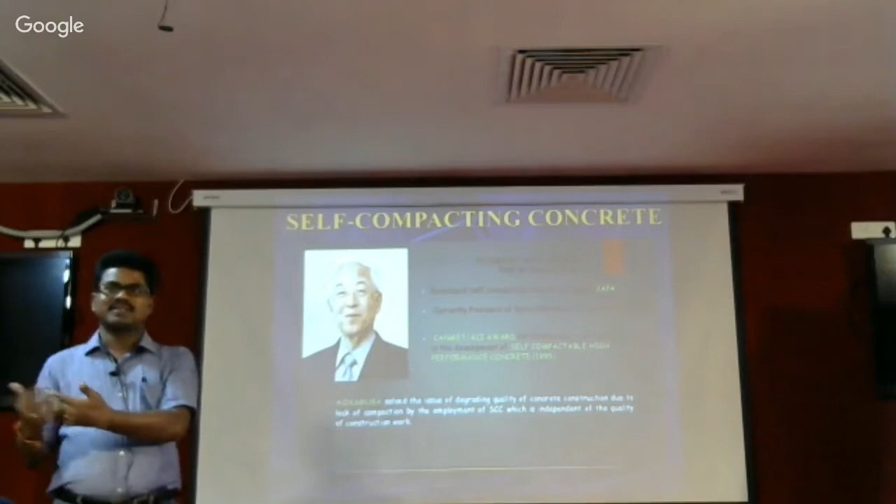What happens if I am using regular concrete? One more thing I want to share: before coming to this post, I was also an assistant executive engineer in the public works department. So I know what practical problems we face. They give some provisions as per the booklet, but it is very difficult to implement all of them.

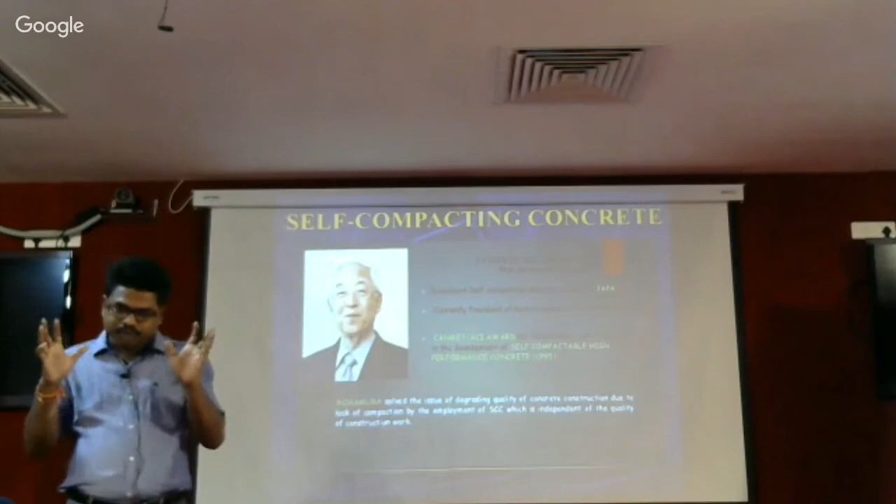They will say this slump is required, this is the concrete, and even practically we have seen yesterday what type of aggregate is available at the site. So it is very difficult to maintain whatever specifications you have, but you have to take a decision with the available material.

You have to try to get good quality concrete. So this is your own decision. Suppose the aggregate is not that good quality, then whether you have to reduce its content, or what measures you have to take, so that even though some material is not good, you still get good concrete. Practically, I think all of you are doing the same with your experience.

When we are working with concrete in regular cases, even if it is giving the strength we are expecting, we are not going to accept it without workability. Workability is the main criteria for the concrete. Strength through workability - that is the concept of concrete for regular concrete.

Suppose you are going for high strength concrete, the concept is similar - we are going to get the same strength through workability. Suppose I am developing M80 or M60 concrete, I have to get 80 MPa without compromising anywhere on workability properties. Workability means how easy you are going to work with that concrete - it should flow easily into all spaces.

Yesterday we saw that bridge - it is completely fully packed with reinforcement, heavily reinforced. In those cases it is very difficult to compact the concrete. Because of that, he developed a concrete in such a way that it compacts under its own weight - no need of any external vibration.

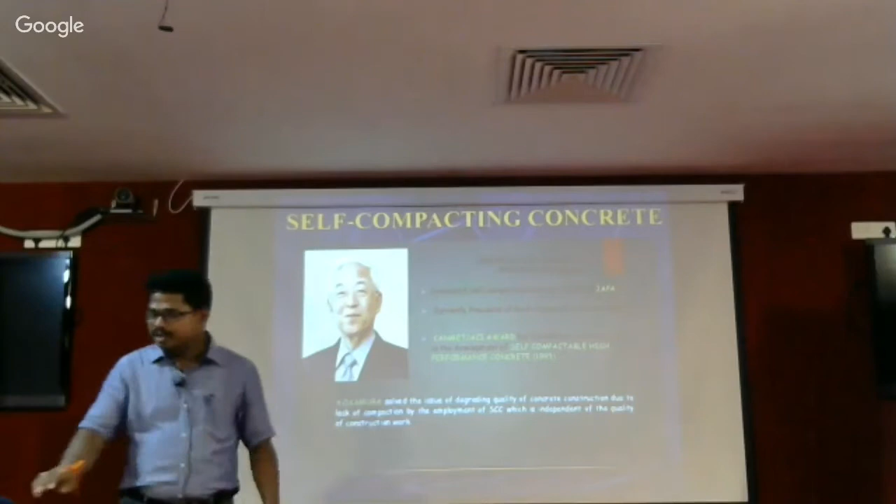Here in the mix design itself, we are going to prepare a mechanism so that it compacts under its own weight. Suppose you are taking a certain volume and putting all these ingredients in it. In our regular concrete, if you see the ratios, coarse aggregate content is more than fine aggregate, and fine aggregate content is more than cement.

Like that you are preparing it, and if there are any voids, you try to compact and avoid those voids by compaction - you are trying to minimize the voids. So in this method, at the time of mix design only, the main concept is if it is densely packed, automatically the voids are eliminated. If it is densely packed, you will directly get high density, and automatically you get high strength - strength is directly related to density.

In a given certain volume, if you are able to fill all the voids with the fines, there's no need of any external vibration. We vibrate to avoid these voids, so here in the mix design itself, we are trying to eliminate the voids.

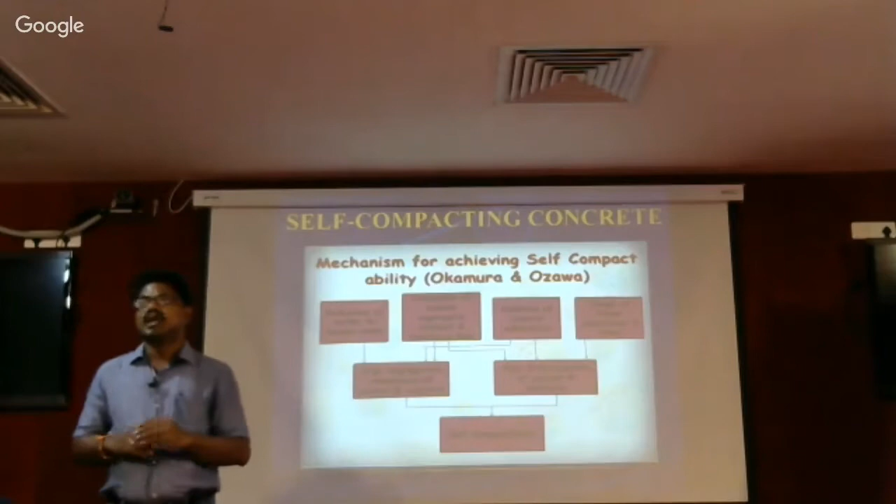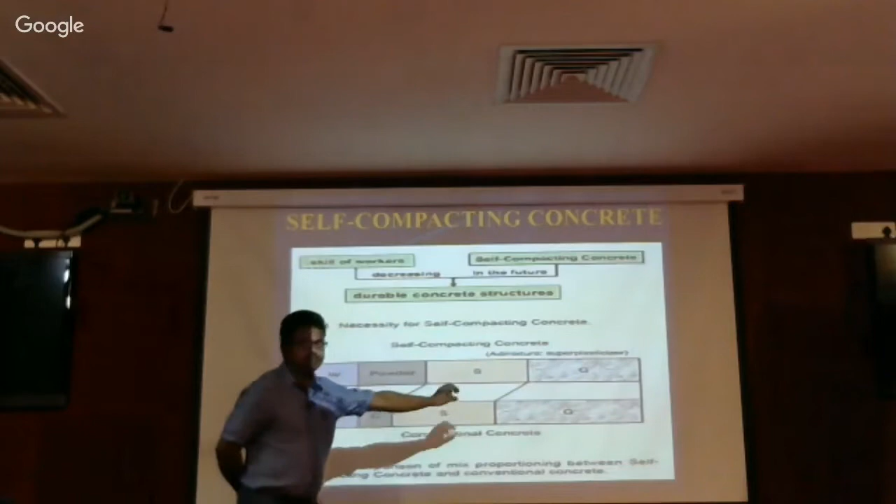For that content, here in SCC, actually what we are doing is, generally the coarse aggregate content is much in our regular concrete, and similarly sand proportion, then cement and water. So in the SCC, if I am increasing the coarse aggregate content, automatically the voids are also increasing.

That's why I am going to limit the coarse aggregate content. I am going to decrease the volume of coarse content, but I am not compromising the strength. Whatever the minimum coarse aggregate is required for that grade of concrete, that I am fixing. Then, because here I am trying to fill the voids with the fine powder, the sand content is more than the coarse aggregate content.

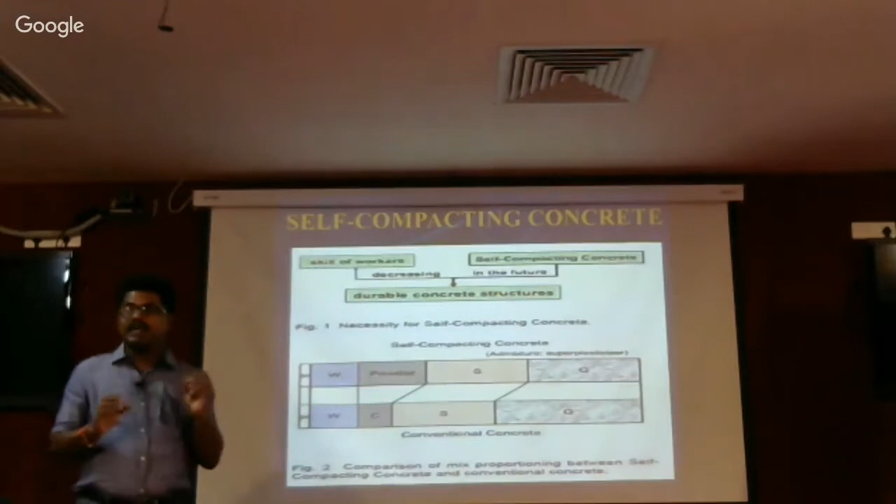Because the concept in the preparation of concrete is, whatever voids are formed by the coarse aggregate, they are filled with the sand, and whatever voids are there in the sand, are filled by the powder. So here fine materials, just like fine aggregate and powder. Here I am saying powder, not cement, because let us say suppose I want to develop an M30 grade concrete.

Generally, with 350 kgs of cement, I can develop 30 MPa. So directly, if I am using 350 kgs, it is not economical. Here we are thinking in the direction of economy, and also sustainability. Because what happens if I am using more cement, more production of cement, then CO2 content increases, then environmental problems, all that we are seeing.

So in this method, the alternative given is, here powder content is required more, but it is not with respect to cement, only whatever the minimum cement required for the hydration process. Whatever strength we are getting is because of this hydration process of the cement. When you are curing, it undergoes a certain hydration process for 28 days. Regularly, if you are curing the concrete for 28 days, it is going to achieve its target strength.

So whatever minimum content of cement is required, that we are going to keep, and the remaining content we are going to add as fly ash or GGBS, any mineral admixture. The advantage of adding mineral admixture is, it is not only decreasing the cement content, but it is also going to form a CSH gel.

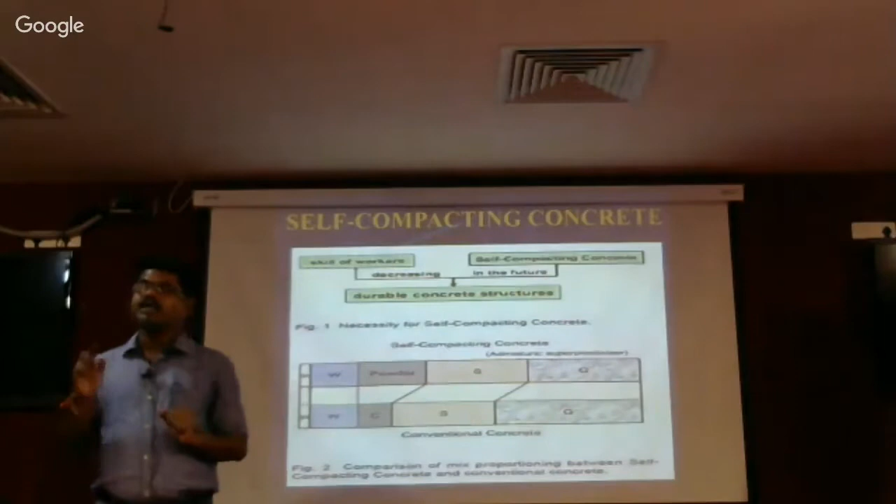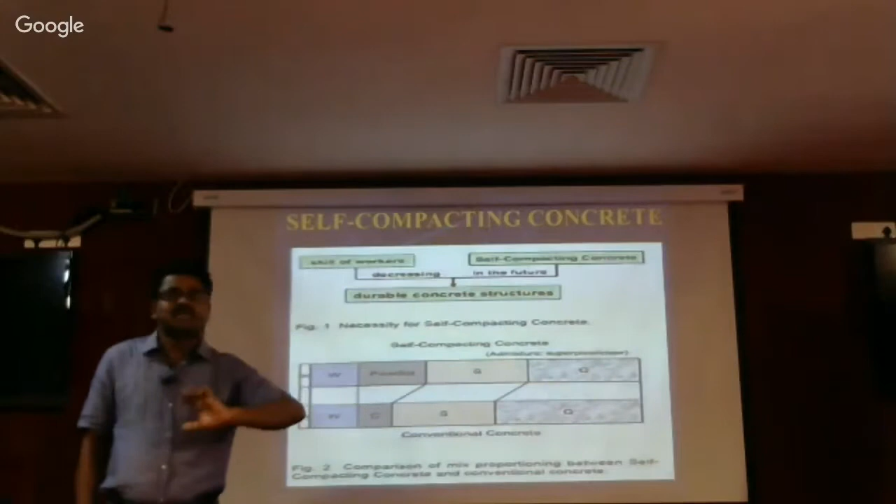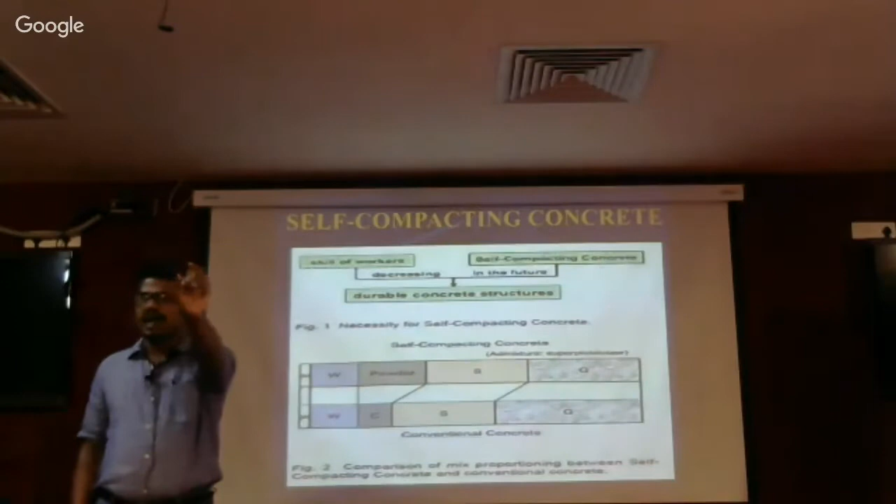Not only the strength, but how long it is going to give its strength. I don't want that for 1 year it gives good performance, and after that you face durability problems. It is not like that. So it is going to give you a concrete which is high strength and high performance because of utilizing these waste materials, whatever the fly ash, silica fume, GGBS, metakaolin, like that. We have different mineral admixtures.

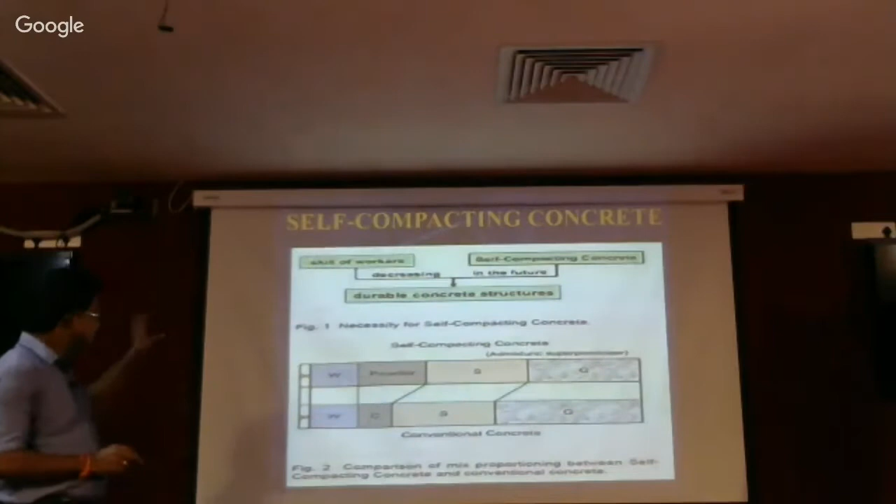And there is also a disposal problem with fly ash and all these things. We are giving two types of solutions. One is we are solving the disposal problem. Another, we are going to give a concrete at low cost with high performance, that is with high durability. So here the main concept is we are going to reduce the water-powder ratio, because when powder content is increasing, water is going to be reduced.

But how are you going to achieve this by reducing water content, when you are saying it is self-compacting, meaning it should flow under its own weight? For that purpose, we are using super-plasticizers, high-range water-reducing admixtures. If I am adding a high-range water-reducing admixture, even though its quantity is less, it is going to show its effect more in the workability properties and in the strength gain properties.

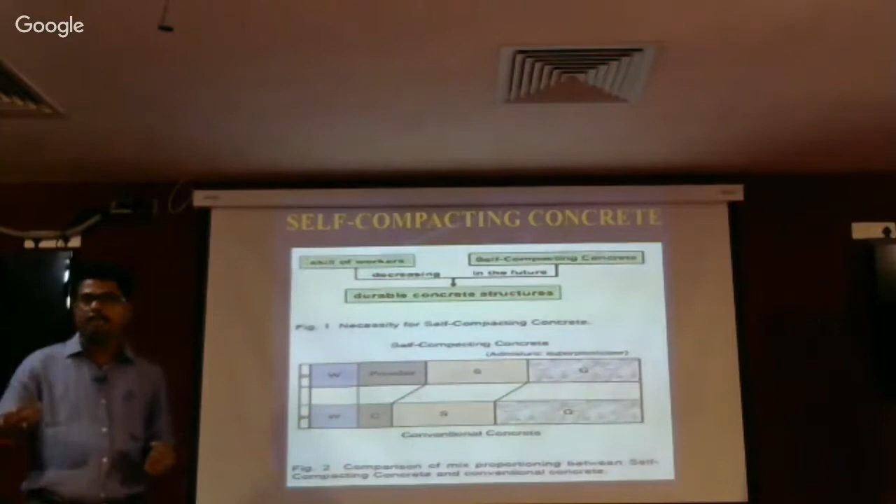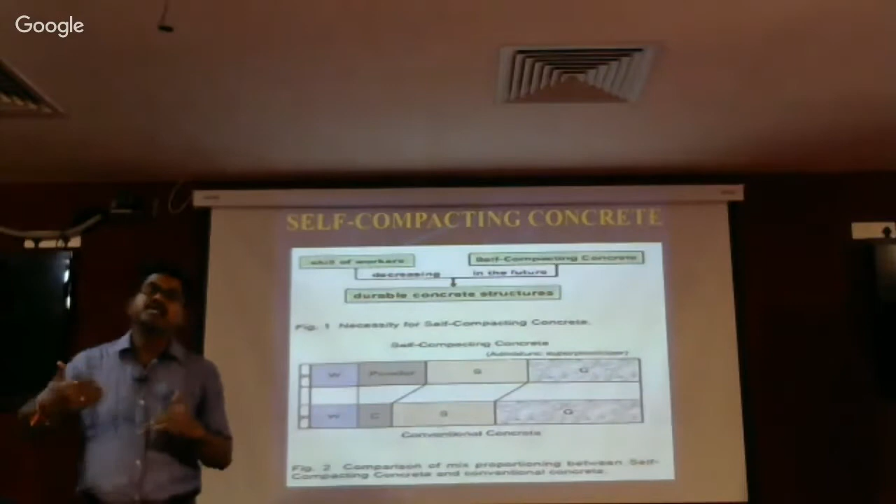Like that, we are going to add a super-plasticizer and viscosity modifying agent, because of this viscosity only, there is a chance of segregation and bleeding. So if you are able to avoid these viscosity problems, then it can flow easily. For that purpose, in SCC, mainly we are going to reduce the coarse aggregate content and increase the powder content. When I increase the powder, automatically the water-powder ratio reduces, so to compromise that, I am going to use super-plasticizers and VMA.

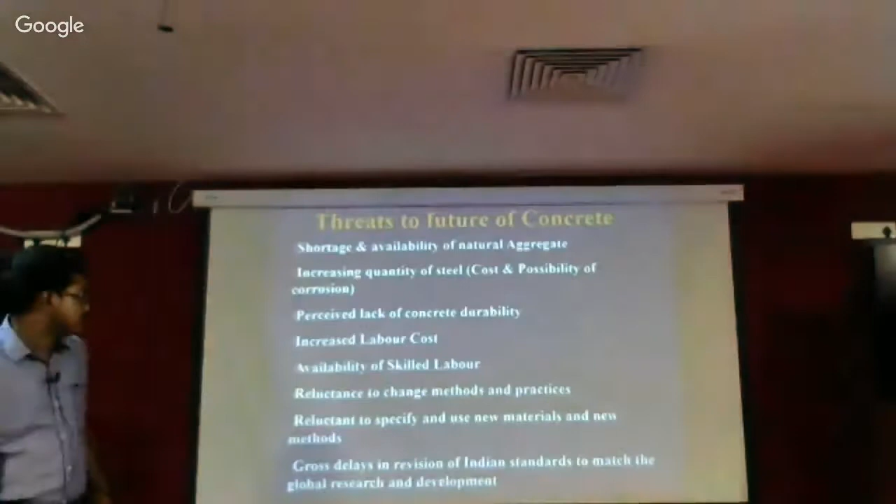These are some threats to the future, because nowadays so much skilled labor is required. If you see the earlier sites, we are working at a height of 20 feet, and at that height you have to pour the concrete. Definitely you have to use the new technology, otherwise you are not going to get whatever strength you want.

What about the water cement ratio? Do you compromise on that, seeing the water powder ratio? Here we are not going to say water cement, we are going to say water powder, that is cement plus fly ash. For that we are going to add water, and that water, whatever is required for the hydration process, that we are going to keep.

But generally, in practicality, if you are not getting the workability, simply you add one mug extra. No rules, no regulations, you will just add one mug extra. But by adding one mug extra, you are going to lose one MPa grade of concrete. So instead of that, we are going to add these high range water reducing admixtures. They react in such a way that even if you add 5 liters of water, it compromises with 1 liter of water, one liter of super-plasticizer affects like 5 liters of water. So like that, we use super-plasticizers and new technology to get high strength and high performance concrete.

So, PPC cement, already fly ash is added. Yes, but in practicality, what you are telling, there is cement, what type of cement? Whether it is OPC or PPC? Yes, I am explaining that.

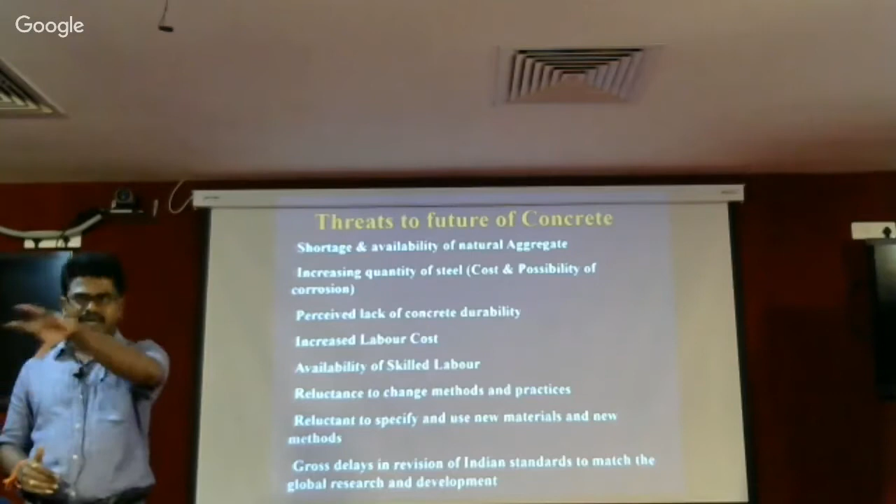So here, when I am saying fly ash, it means it is an ash. There is a small correction in the collection process. If in the collection itself I am using any techniques, then I call it ground granulated blast furnace slag. It is also a slag, but based on how you are collecting it, we give different namings. Fly ash is just collected directly from the funnel, and we are using this.

Mainly what happens with the ashes is they are very fine. Because of this fineness, they spread over more area, occupy more area, and automatically fill the voids. In our regular concrete, we are not thinking about the voids forming with respect to sand. But in SCC, because we are using very fine powders, whatever voids are forming with respect to sand are also filled with these mineral admixtures.

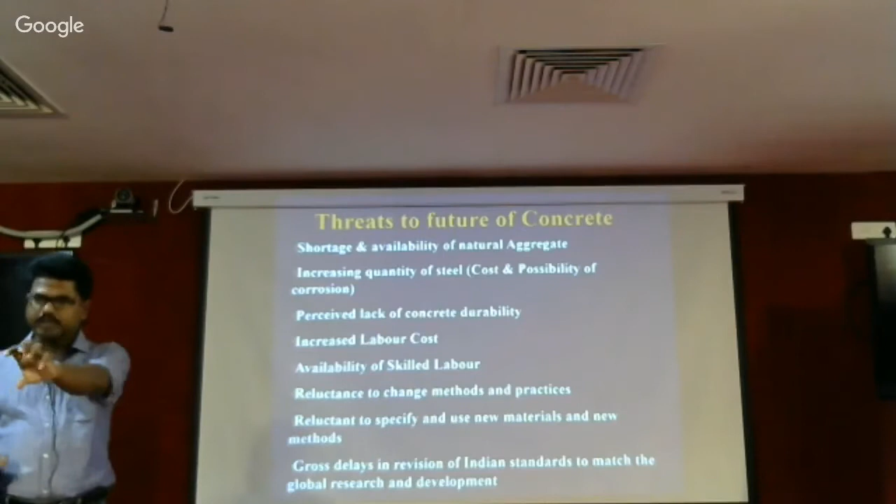Right. Nowadays we are almost always using PPC. In that, fly ash content is already there, 20 to 25%, and you have to develop a mix design procedure with respect to that cement. I have already developed an SCC mix at NIT Warangal, but I cannot say the same mix is suitable here, because here the sand is zone 4 sand. The sand I used in Warangal is zone 2 sand.

Accordingly, now I am guiding a research scholar, Prasenjit Shah. He is developing an SCC suitable to this northeast zone. We are not going to say use the same SCC proportions I developed in Warangal, because here the sand is zone 4 sand, which has so much mud content and more fines, and you are not going to get the same strength. Even collecting the sand is very difficult. That's why we are going to replace the sand also.

We are trying to give a solution to this zone 4 sand by adding some quarry rock dust. When doing mix design, we are also using crusher dust to improve the gradation of the sand from zone 4 to zone 2. Yes. Okay, okay, good, very nice.

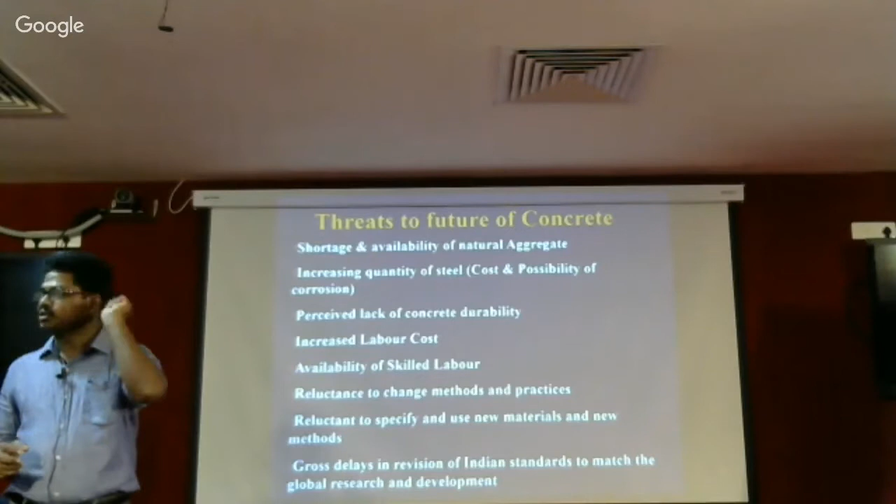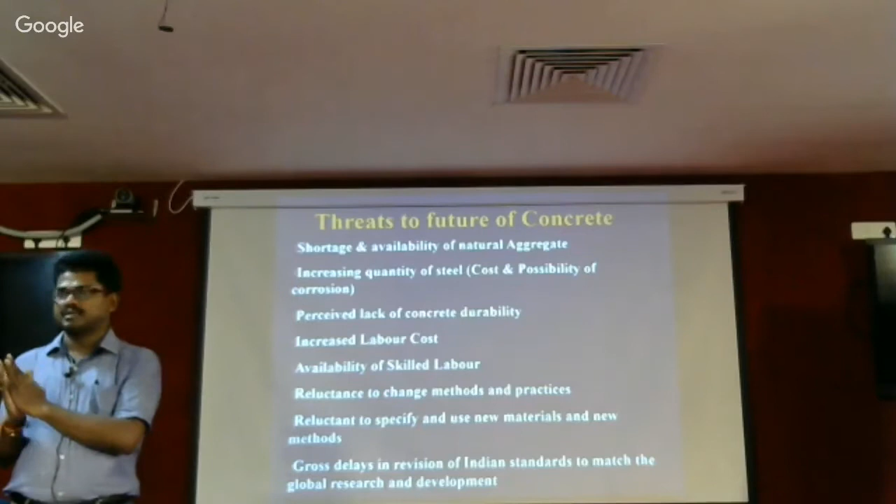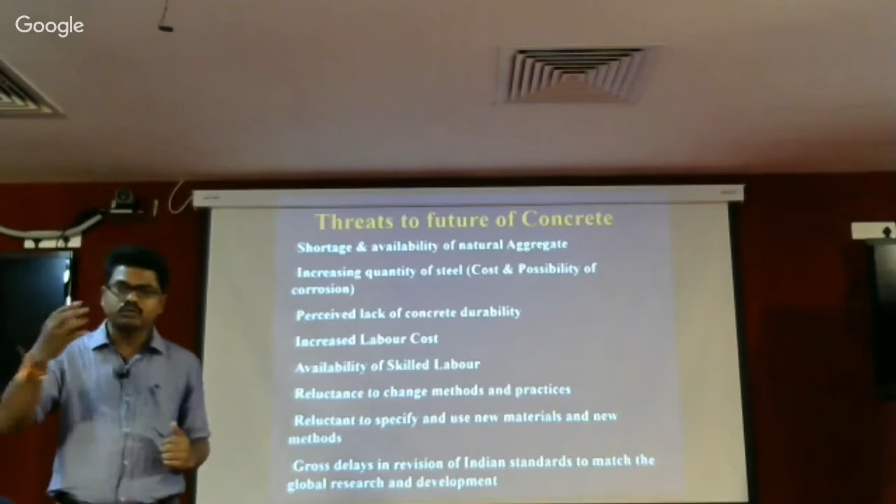And we are trying it for SCC, not for regular concrete. His work is to develop SCC suitable to this northeast zone, mainly concentrating on sand. We are not replacing both at the same time, because if I replace aggregate and sand, it is very difficult to say what the effect is. So first we are trying to replace the sand and find the optimum dosage. I cannot replace 100%. So what is the optimum replacement of this zone 4 sand, so that it improves its quality and develops self-compacting concrete?

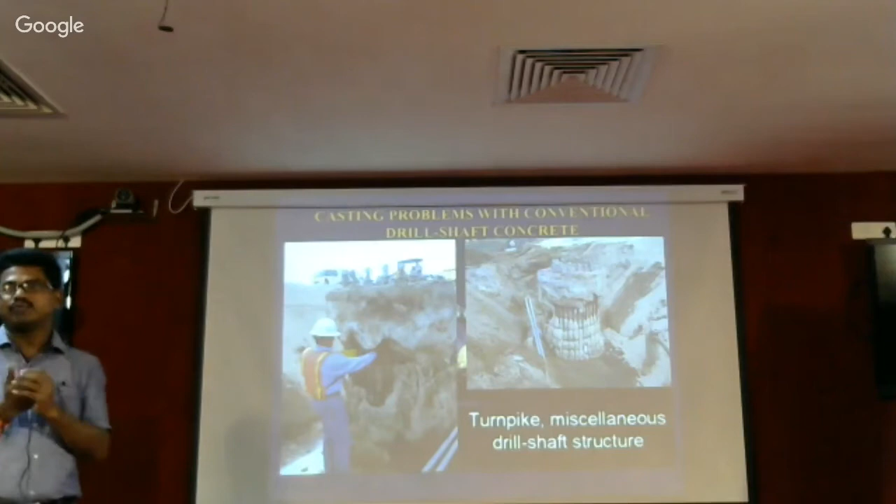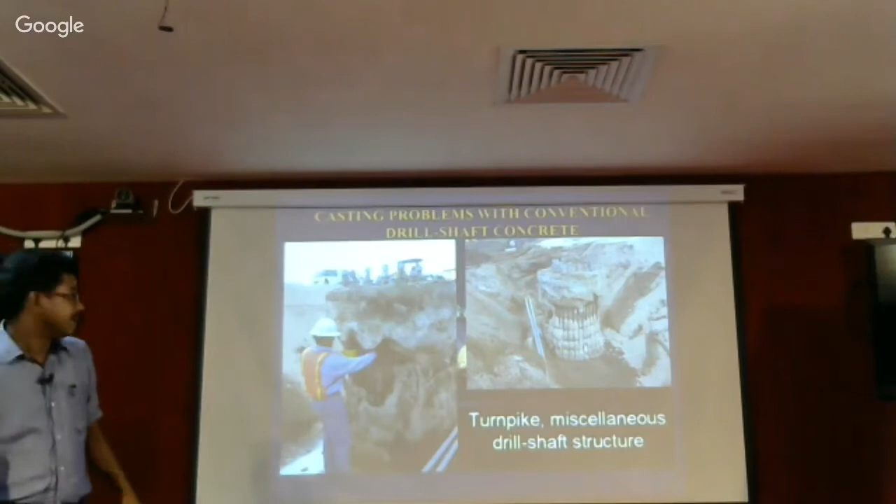I will show some videos of the tests we are doing. See, these are the practical problems. Yesterday we saw the piers. They are thickly and heavily reinforced. In those cases, it is not even possible to vibrate. If there is any possibility of vibration, you can vibrate, but here there is no chance. So in those cases, SCC works better. I will show some tests on SCC. These are all the related theories.

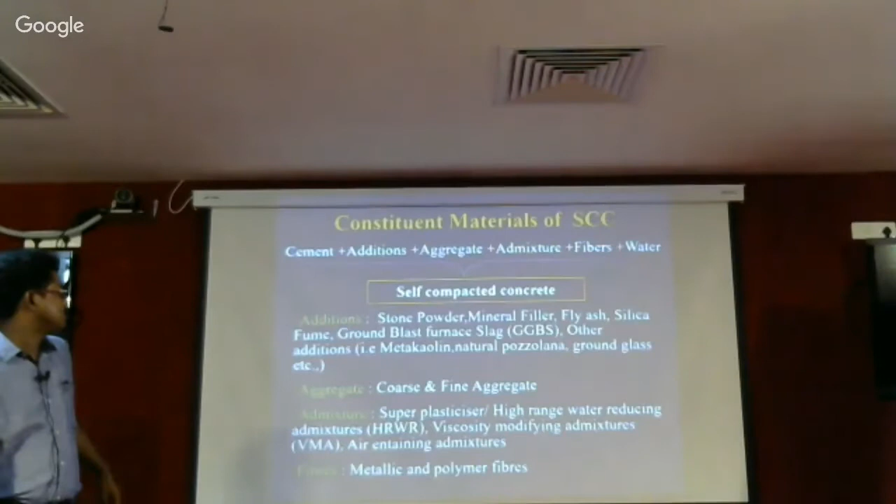For SCC, EFNARC has given some specifications. For self-compacting concrete, we mainly use 4 tests. One is the horizontal flow test. We do not take the vertical slump, because it is highly workable, without a limit of 100 mm slump. We look in the horizontal direction. The same slump cone is used here. When I lift the slump cone, it should flow horizontally a minimum of 600 mm. Then I say it is fine, because I am checking its passing flowability.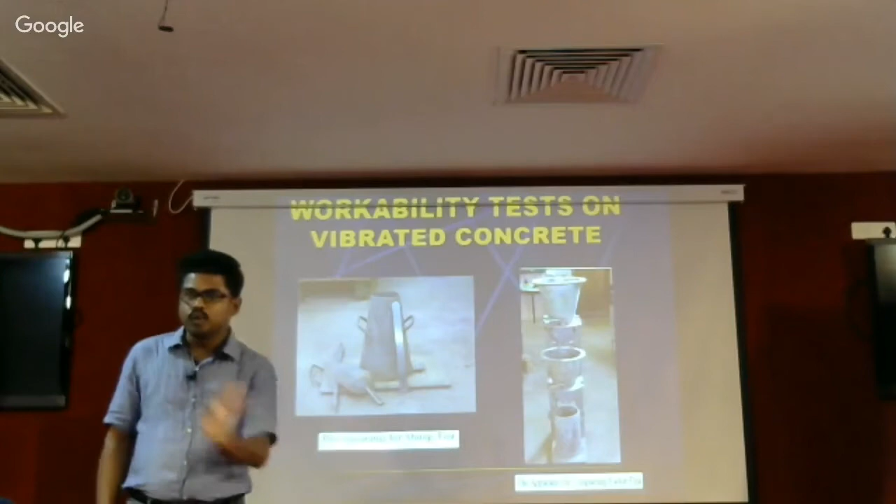That means just lifting the cone, by its own weight, if it is able to spread 600 mm width, then I can say one test is passed, that is flowability. Similarly, we are going to have another test called the J-ring test.

So J-ring means here I am going to keep the ring. In that I am going to use this cone and I am going to lift this cone. After lifting this, inside the ring and outside the ring, the height difference should not cross 10 mm. I am measuring the height difference inside the ring and outside the ring, because if there is a height difference, it means it has not flowed properly.

Why I am keeping this J-ring is because in practice you are going to have some obstruction. That obstruction is the reinforcement. So I am going to keep a similar obstruction and see, even if I am putting some obstruction, how it is going to flow. I can show you these videos too.

See how it is going to flow. It is a horizontal flow, not a vertical flow. So that diameter, if I am taking it, should be minimum 600. The code says it should flow minimum 600 to 800 mm. Like that, we have to design.

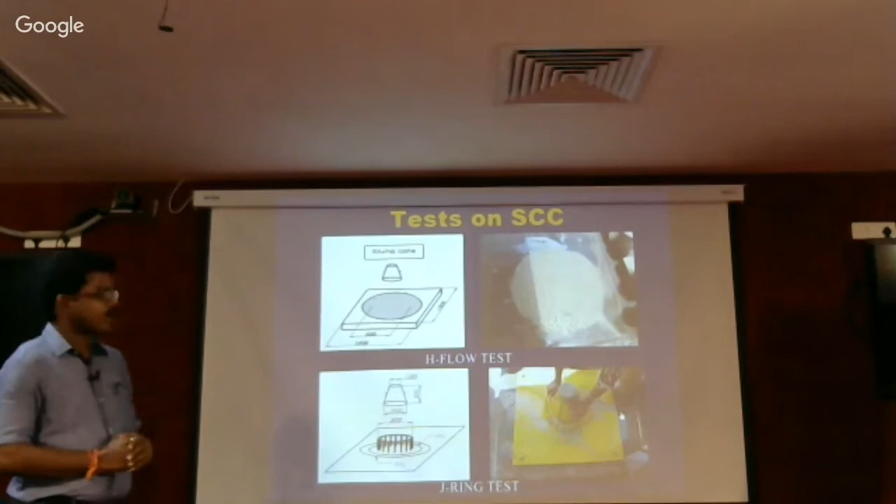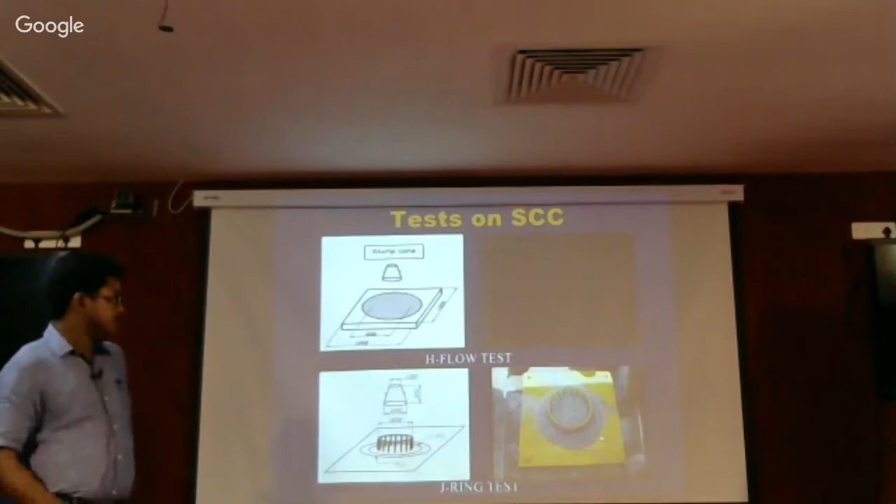Similarly, we have the J-ring test. So in this J-ring test, if I am lifting the cone, it is also going to flow, but inside and outside, if I am measuring the vertical heights, the height difference should not be 10 mm. That means even if some obstruction is coming, it is ready to flow. That is called passing ability. One is flowability, another one is passing ability.

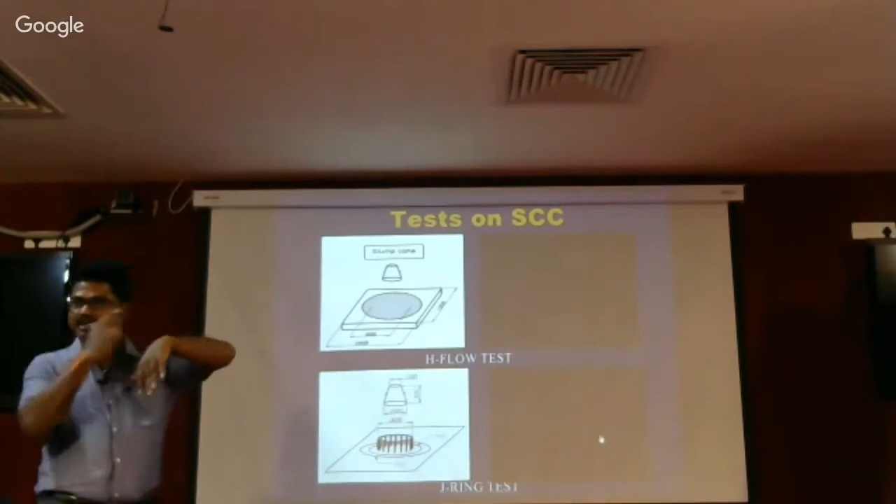Similarly, we have the segregation resistance test. Segregation means if I am keeping the concrete just in a container for 5 minutes, 10 minutes, generally it is going to segregate. But here we are going to test that even if I am keeping it 5 minutes just like that, it should not segregate. For that we are going to use this V funnel.

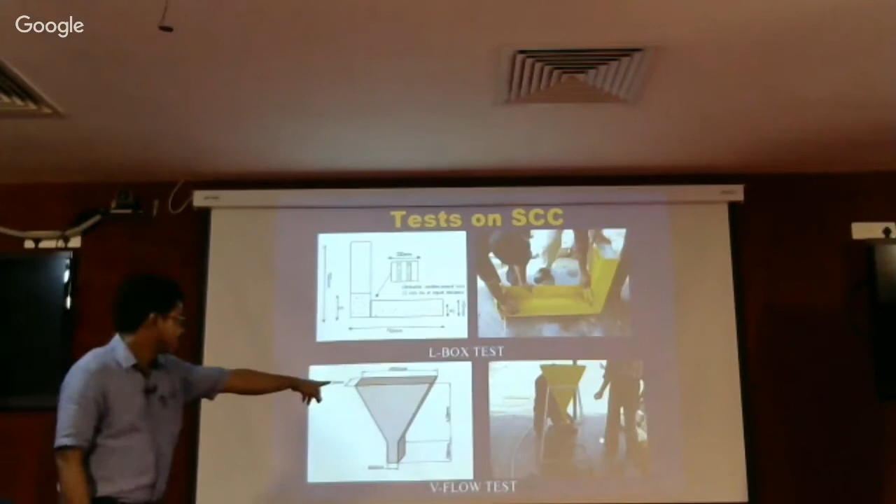In this V funnel, first I am totally filling this V funnel, and there is an opening arrangement. If I am opening this V funnel, it should empty within 6 to 12 seconds. If the concrete is able to empty the total volume of this V funnel within 6 to 12 seconds, then we can say it is a self-compacting concrete. That is one passing ability.

Another test is, once again I am going to fill this V funnel and keep it for 5 minutes. Then I am going to open it and give it a chance to flow. Let us say initially it took 8 seconds to empty the V funnel. Next time, after waiting 5 minutes, it should not take more than 3 seconds extra. That means initially it took 8 seconds, so it should not take more than 8 plus 3, that is 11 seconds. Within 11 seconds, it should finish.

Suppose after waiting 5 minutes it still finishes emptying within 11 seconds, then I can say no segregation. So if it is satisfying all these tests, only then are we going to brand it as self-compacting concrete. Nowadays, we have flowable concretes. At the site, I asked them, they are using flowing concrete. There is a small difference between flowing concrete and self-compacting concrete.

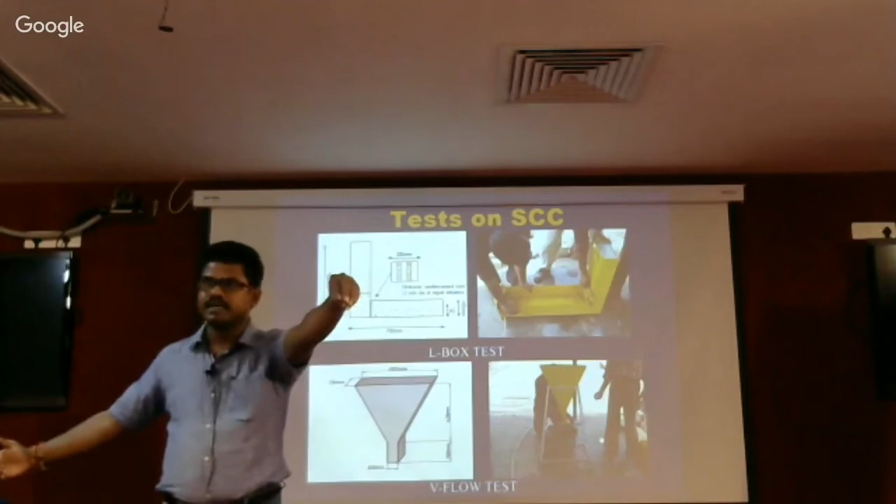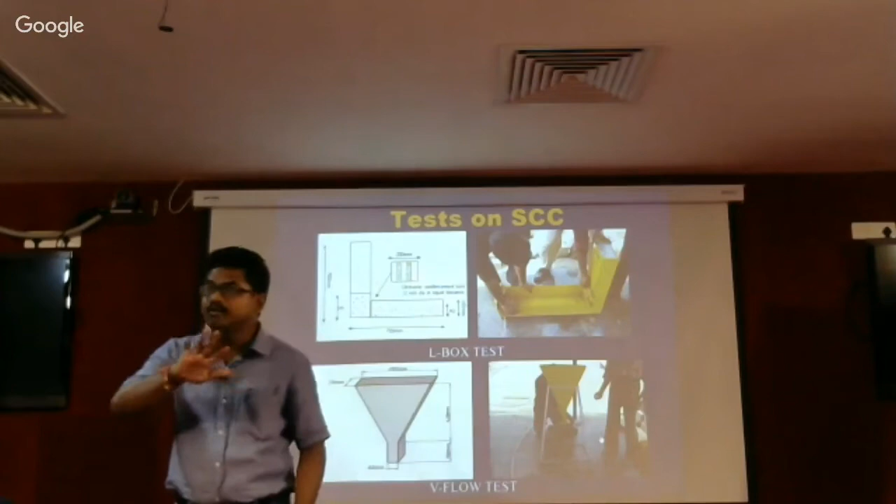We are adding some retarders, so that it keeps for some 30 or 45 minutes based on the distance from where you are preparing the concrete to the execution site. Accordingly, we are going to add these chemicals. If you are adding those chemicals, it keeps for up to 45 minutes. It is still in the flowing stage, and they are using pipes to place the concrete. But there, compaction is required. It is only a flowable concrete, not a self-compacting concrete.

Okay, so this is also one type, the L-box test. Similar to that, we are going to keep concrete on one side and another side. Here we have two sides. So first I will fill the concrete, then I will open this one, then it is going to pass through.

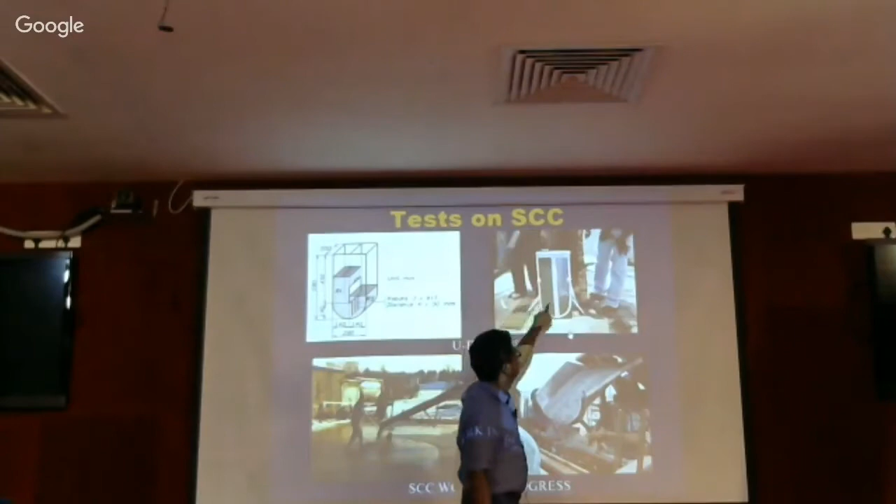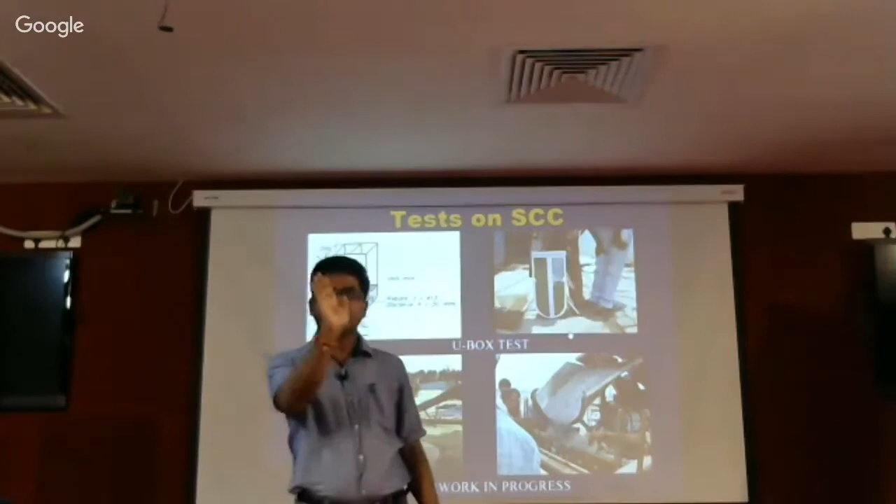That means if it is flowing from one side to another side, because concrete is passing through the pipe. Even if it is passing through the pipe, even if some vertical directions are there, then also it should pass. Like that also we are testing. That height difference should not be greater than 30 mm in that case. Then we are going to say it is SCC.

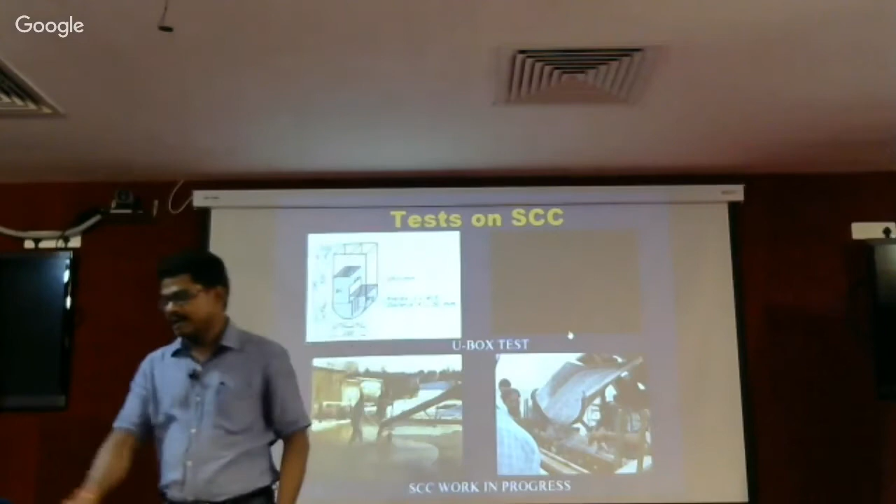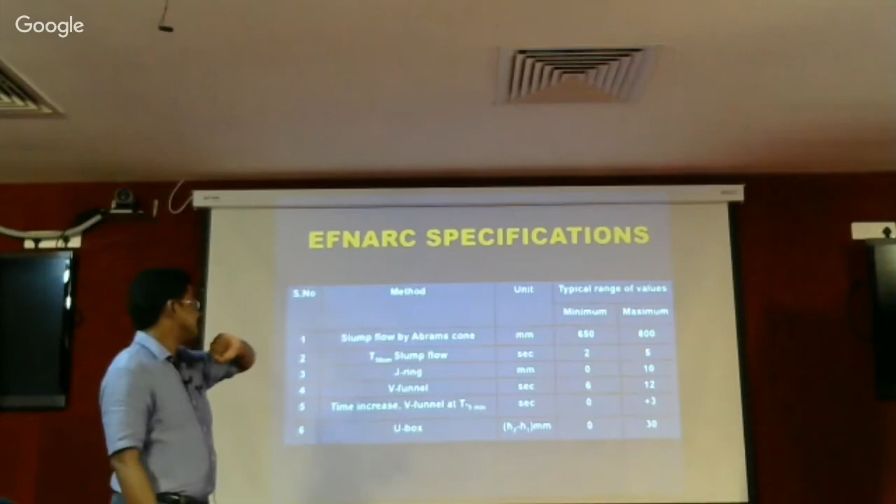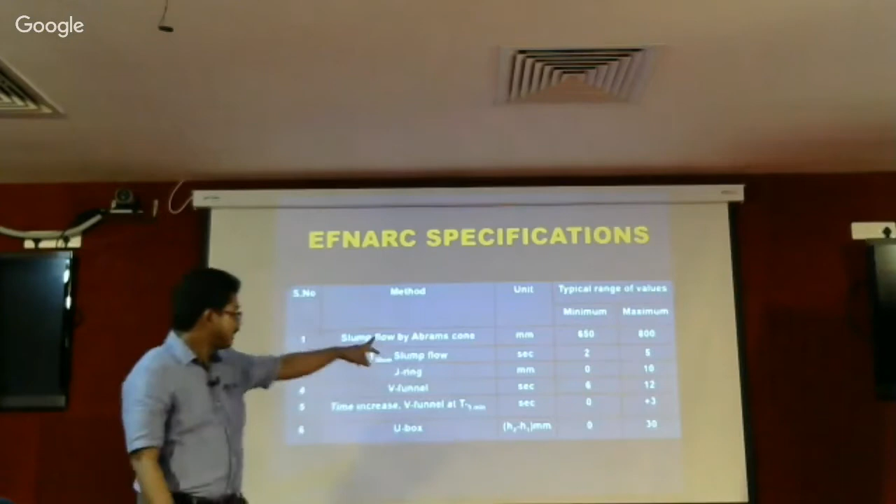So for the mix design, these are the EFNARC specifications. The European Federation has given some specifications. They say that if it is a slump cone, minimum and maximum, it should be within these limits, 650 to 800 mm. That's slump cone. Similarly, T50 centimeters in seconds. When I am saying horizontal flow, all these are related to viscosity and shear. Even if we are measuring with respect to time, to flow that 500 mm diameter it should take 2 to 5 seconds. It should not take more than 5 seconds.

Like that, these are some mix proportions I have developed for M20, M25. I can use the ACI method or IS code method. Initially I can start with that, but you have to go for trials. Actually, we are following the Nan Su method of mix design. If you are following Indian code, these are the proportions you are getting. But to get these proportions, you have to go for so many trials. And if I developed this in NIT Warangal, it is not suitable in NIT Silchar, because again I have to go for the trials based on the material availability.

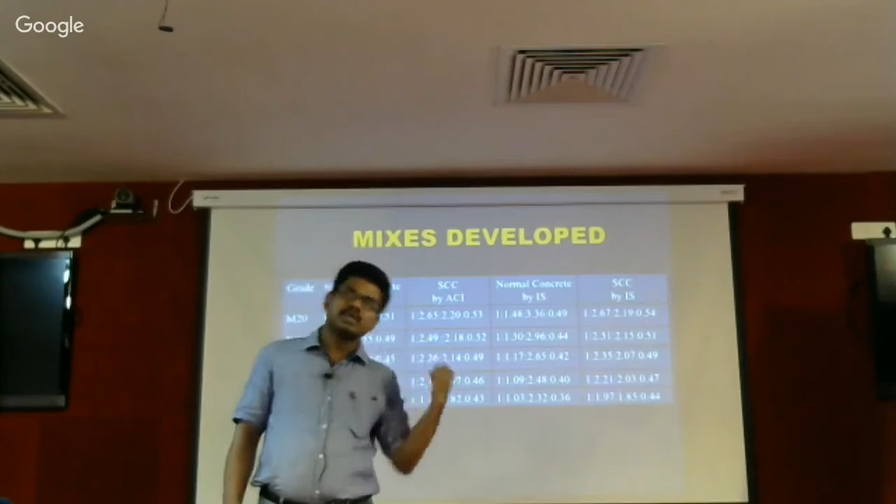Another thing, just 2 minutes I want to spare. Not only self-compacting concrete, nowadays we are seeing curing also is a big problem. Actually, it should be cured for 28 days, whatever the material or quality of cement you are using. But in government practices, I think no one is going for 28 days curing. They will go for minimum of 7 days or 14 days maximum. So this is also a practical problem. That's why now we are also working on self-curing concrete.

Similar to this, we are going to add some epoxy coatings or polyethylene glycol, that is the chemical. We are going to add this, then no need of any curing. Even the practical tests we are doing here. Suppose I am preparing one concrete with curing, another one just like our practicals, I am preparing and leaving it. Another one I am using this polyethylene glycol chemical, and I am also not curing it. Self-curing, no curing, and curing with water. Like that we are doing, and we are getting good results.

Polyethylene glycol is practically also available. L&T company is using this self-curing concrete in practice. Even Lanco is using self-compacting concrete. Practically in Bombay, in one tunnel, they have used self-compacting concrete, and even now the IIT Hyderabad new campus is being built with self-compacting concrete. It is slowly coming into practice.

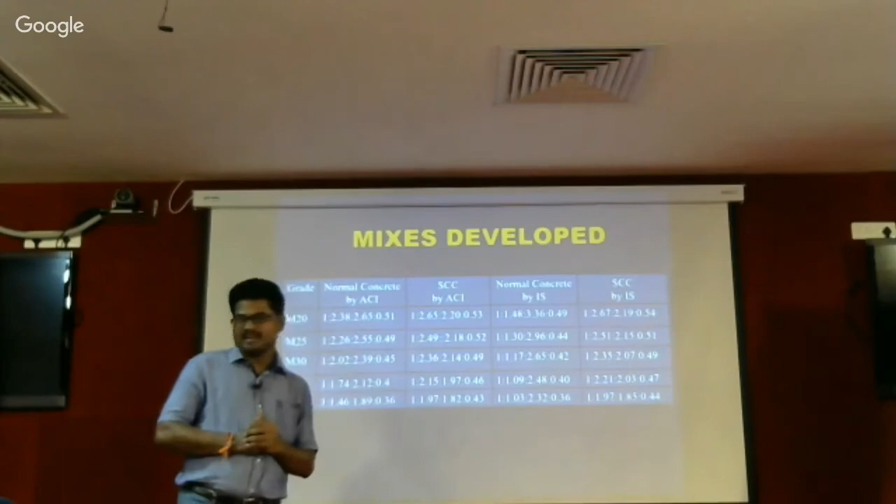Have you seen? Okay. It is going on now. Many special structures are coming up. Even in Delhi it's coming up. There are admixtures.

I was just asking our cameraman what is the type of cement available in this locality, the cement brand, and how they get marketing done, which is beyond Amazon.in or Flipkart kind of advertisement. So it's very interesting, the quality of cement that is available here locally.

2 weeks back when we were in Imphal, cement Max, M-A-X, एक बोरा cement का दाम है वहाँ पे. He says that now it is 450, but another 20 has been added, 470 per bag. Here it is 300 or something, 350. Delhi also around 275, 300, something like that.